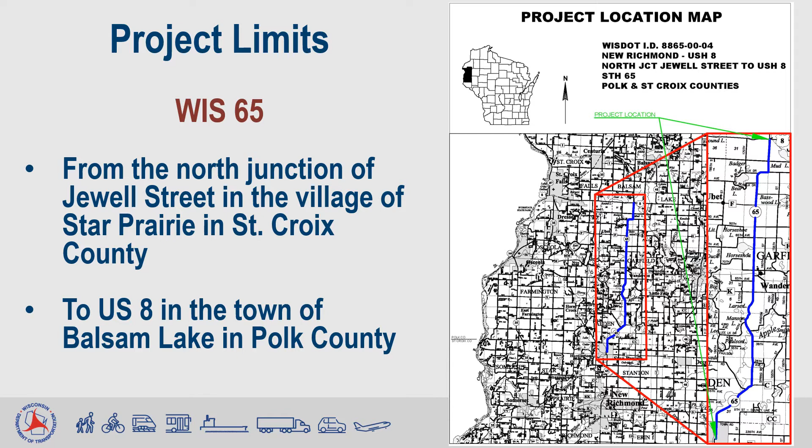The proposed project limits are shown on the map. The project starts at the north junction of Jewell Street in the Village of Star Prairie in St. Croix County and extends north to US Highway 8 in the town of Balsam Lake in Polk County. The total project length is 14.945 miles.

The purpose of this project is to address deteriorating pavement. The existing pavement along this segment of Wisconsin 65 has cracking and rutting, pavement patches, and deteriorated shoulders. If the deterioration isn't addressed, additional maintenance projects, which come with a cost, will be required, and the service life of the road could be cut short. While there have been spot improvements completed recently, the majority of the project was last resurfaced in 2001.

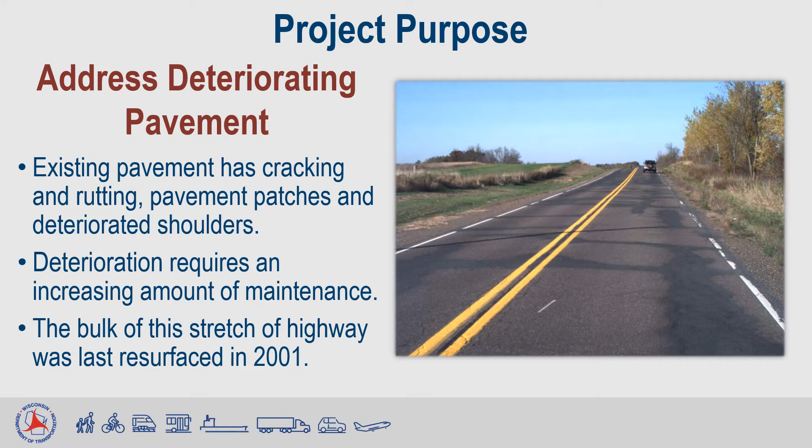This project also aims to improve safety. For the 5-year period between 2013 and 2017, there were 55 crashes reported along this segment of Wisconsin 65 and intersecting side roads. There were 21 crashes resulting in injuries and 1 crash resulting in a fatality. 33 of the crashes resulted in property damage only.

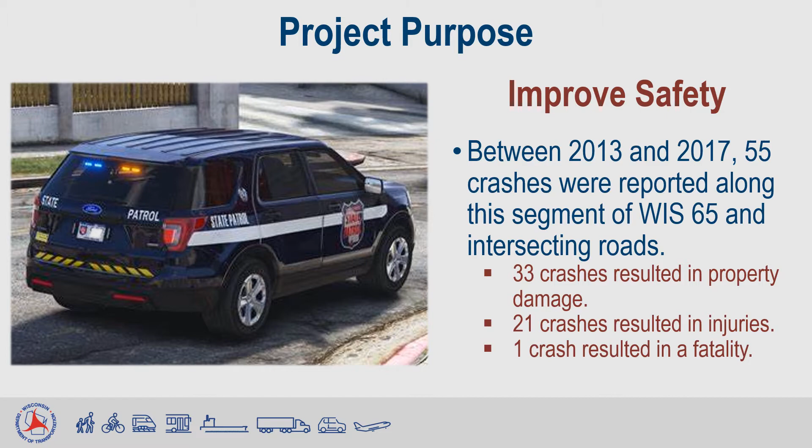Several horizontal and vertical curves do not meet design standards for the corridor's posted speed limit of 55 miles per hour. A safety review of the crashes found that 3 areas along this segment have the needed cost-benefit ratio to improve the road.

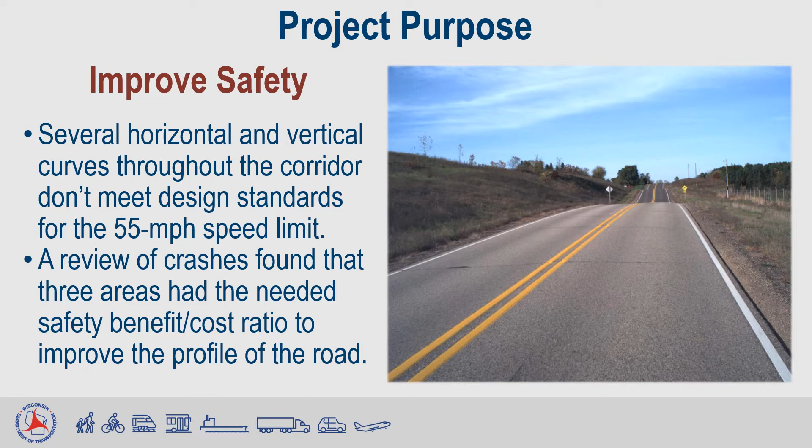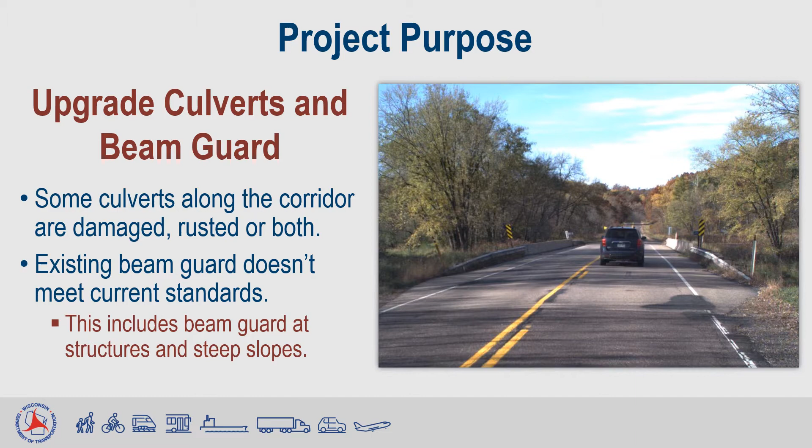The final purpose of the project is to upgrade culverts and beam guard. Some of the existing culverts along the corridor are damaged, rusted, or both, and will be replaced, repaired, or cleaned as part of the proposed project. Additionally, the existing beam guard doesn't meet current design standards and will be replaced.

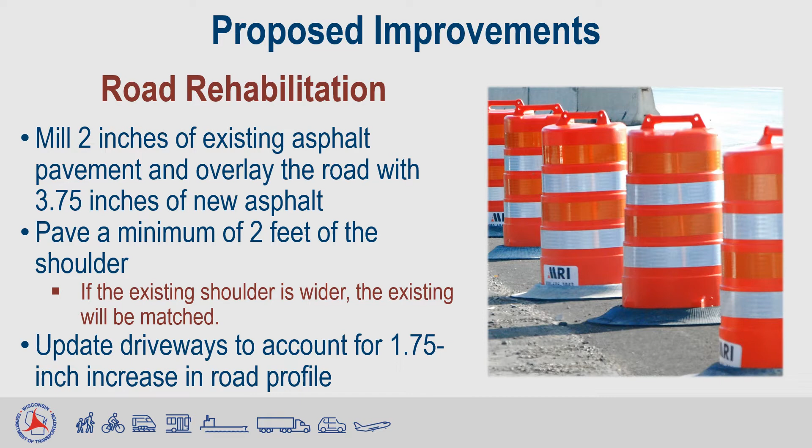Proposed improvement areas fall into 2 different categories: road rehabilitation and road reconstruction for this project. The proposed improvements for the rehabilitation areas include milling 2 inches of existing asphaltic pavement and overlaying the road with 3.75 inches of asphalt pavement. The newly paved roadway will include a 2-foot minimum paved shoulder. If the existing shoulder is wider than 2 feet, the existing width will be matched. This work will also include minor updates to driveways to account for the 1.75-inch increase in road profile. Little to no grading is anticipated in these areas.

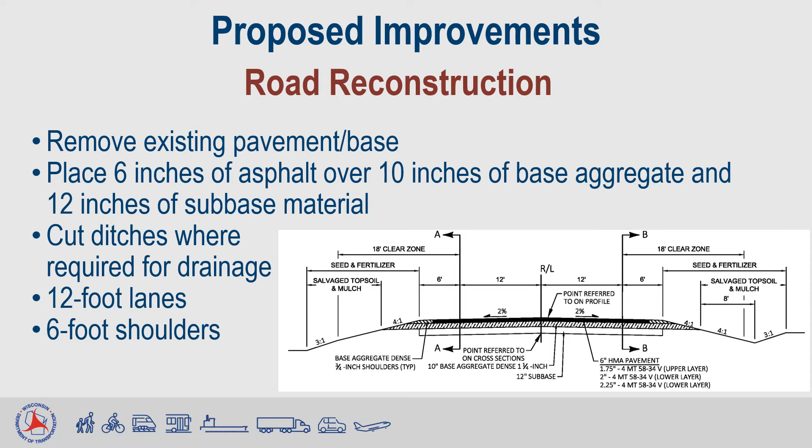The proposed improvements for the reconstruction area include removing the existing pavement and base, placing 6 inches of asphalt pavement over 10 inches of base aggregate over 12 inches of sub-base material. The reconstruction areas would also require ditch cutting for drainage where necessary. The proposed roadway section includes 2 12-foot lanes and 6-foot shoulders, of which a portion will be paved. There are 3 areas of reconstruction in the project area.

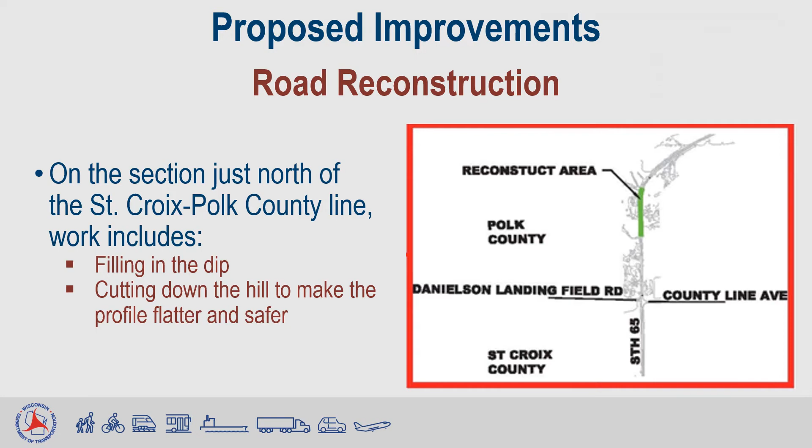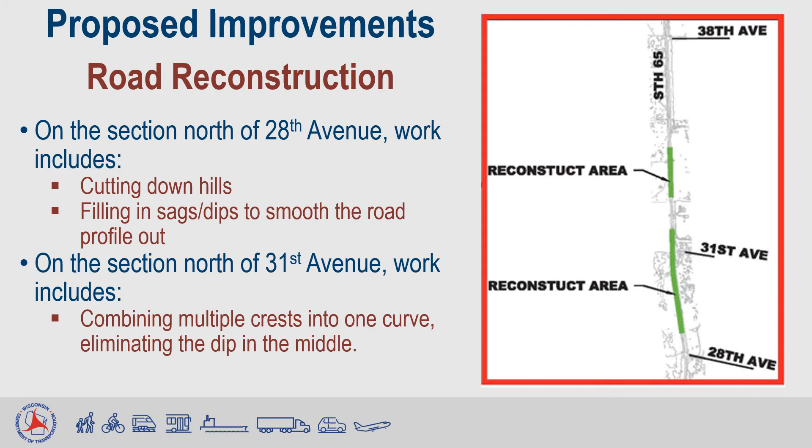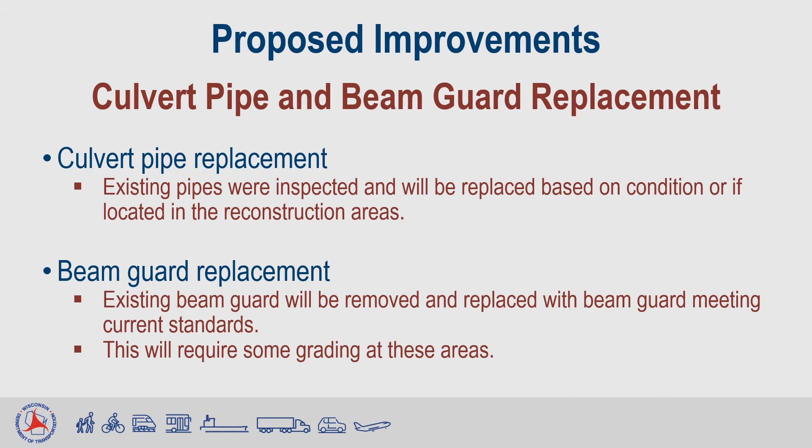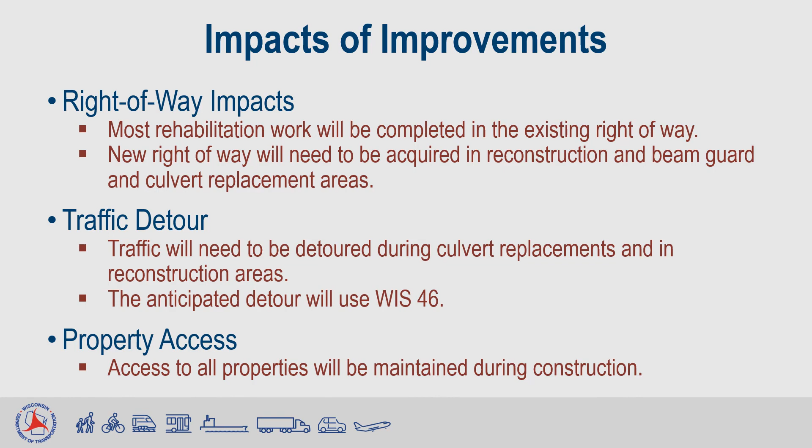Have questions or comments about the upcoming work? Reach out to Beth Cunningham, the WisDOT Northwest Region Project Manager, or me, Mark Peterson, the Ayres Project Manager. We are requesting any formal comments are submitted by May 7th, 2021 in order to include a summary of public comments in the environmental document. Go to the project page on the Wisconsin Department of Transportation website to find the comment form and more information about the proposed project. Comment forms are due by May 7th, 2021.